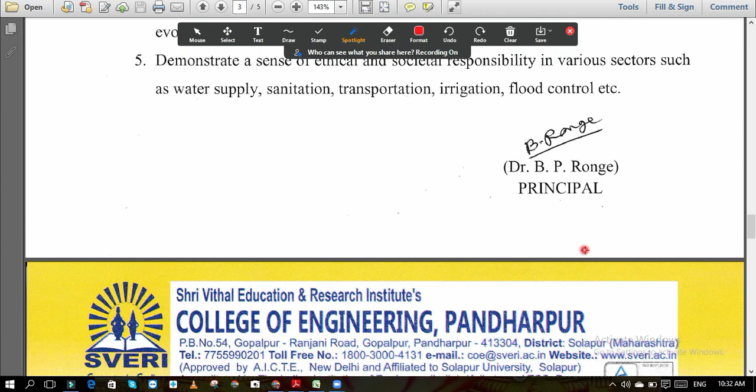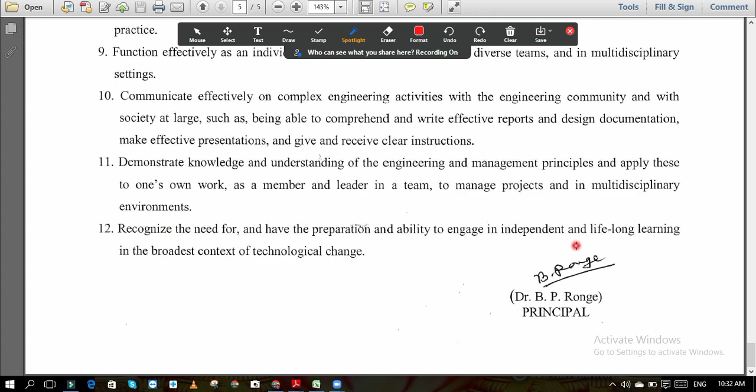Now, program educational objectives - these are 5 program educational objectives, which you have already known. Then we are having program specific outcomes, 3 program specific outcomes are there. Then we are having program outcomes, 12 POs are there. So these are the things.

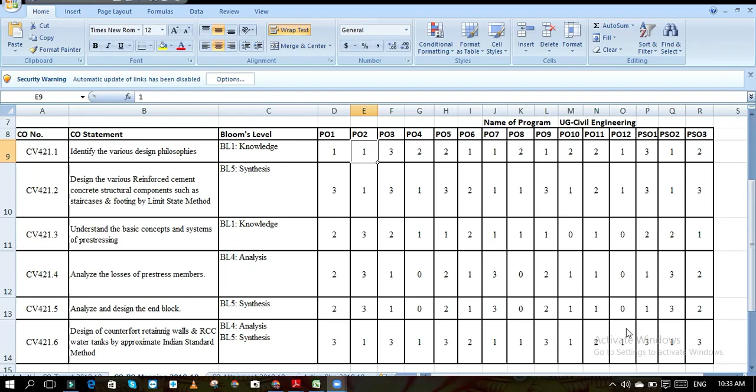I will send this PDF to you, you can go through these things. So now, after this vision mission, we will go for COs, course objectives - what you are going to learn in this course. So now here, these are the course objectives of Design of Concrete Structures 2.

After the completion of this subject, what you will be able to know and what you will be able to do is written in short in this course objective. These skills should be developed in you after learning this subject. Okay, so this is the mapping - forget this mapping, just concentrate on this part: first column CO number, CO statement, and Bloom's level. On these 3 columns you concentrate.

So first, after completion of the course successfully, the students will be able to identify the various design philosophies - what are the various design philosophies that you will be able to identify. Then second CO is design the various reinforced cement concrete structural components such as staircase and footing by limit state method. So you will learn how to design the staircase and how to design the footing by limit state method.

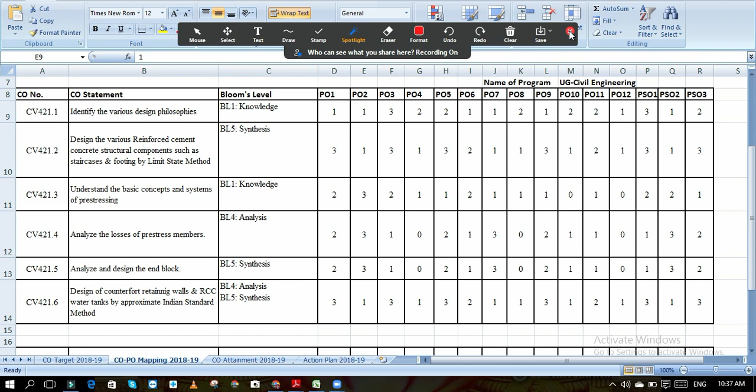You can take the screenshot of this. Now, moving further, we will move to the syllabus.

So these are the course objectives designed by your subject teacher, things we are expecting you to learn. Now we will move further, to section 1. In section 1 there are 4 units. In section 2 again 5 units are there. So in all, total 9 units are there.

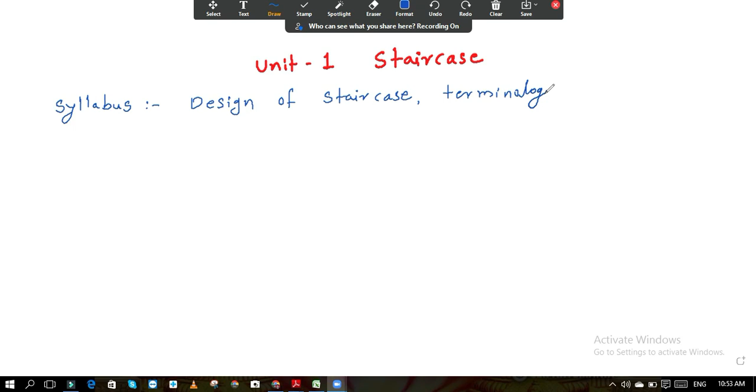So, syllabus. What is the syllabus of this unit? Here you are going to learn design of staircase, then terminologies - different terminologies are there - then design of dog-legged staircase.

Then design of dogleg staircase, open well staircase, and open well staircase with solid waist slab.

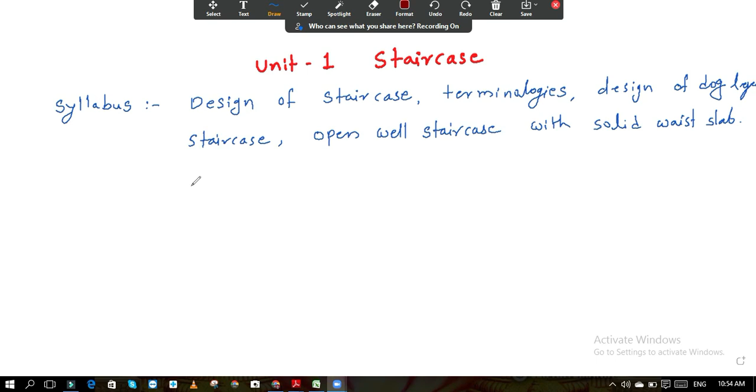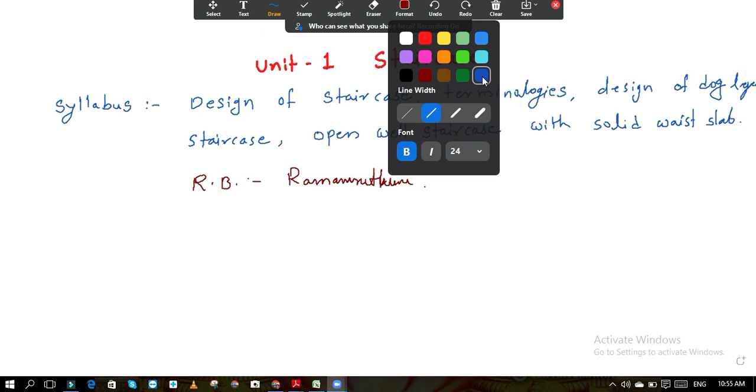For this unit, I will recommend a book for you, and that book is by Ramamrutham - author of the book. If you ask me for a recommended book, it is Ramamrutham. This is a good book for this unit, so refer this, it is very nice. So this is the syllabus.

Then next is about the title of the chapter. What is the staircase? It is the means by which one floor is connected to the second floor - the means by which two floors are connected is nothing but the staircase. The staircase is a structure used in day-to-day routine life. You know what a staircase is and why we use it.

A staircase connects two different floors to each other, so that we can use the top floor also, which is not on the ground, with the help of the staircase only. So about this, I can write over here about the title of the chapter.

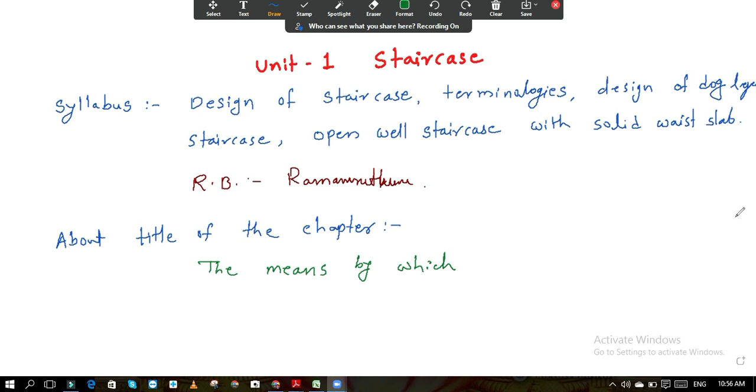The means by which two different floors are connected for motion or movement of people.

Is nothing but staircase. So this gives you the idea of what the title suggests. So is it over? So we will go to the next board.

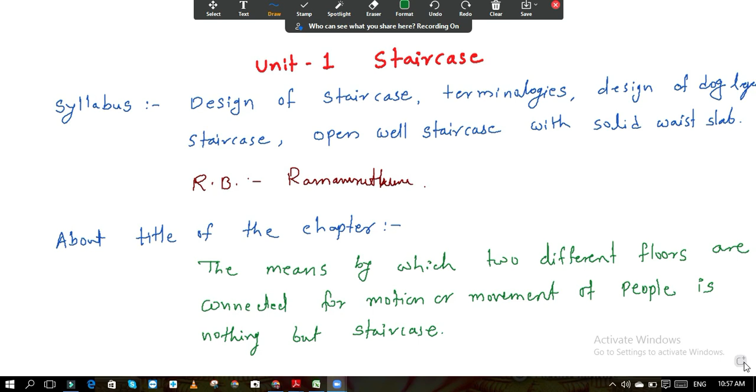So the next thing is the central idea of the chapter. What is the central idea of the chapter? This chapter is basically focused on the Indian standard design of staircase.

According to our IS code, Indian standard IS code, we design the staircase, and some basic terminologies are there - what is riser, what is tread, what is landing, mid landing, and all those things come under terminology. The design procedure of dogleg staircase and open well staircase are discussed in this chapter. So in this chapter, as I've already told you, we are going to design dogleg staircase and open well staircase.

So about this I can write over here: chapter or unit focus on Indian standard design of Indian standard design of staircases.

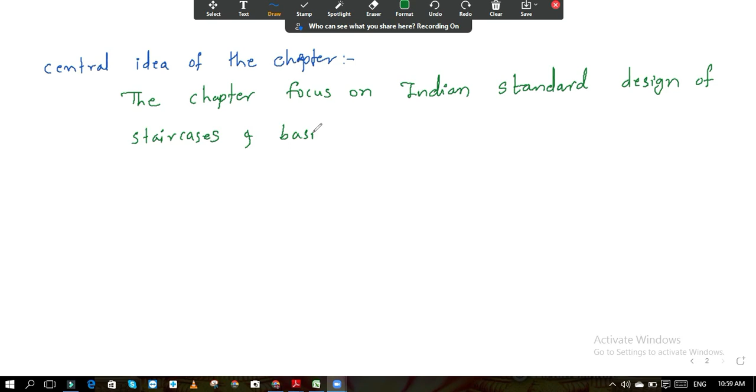Indian standard design of staircases and basic terminologies, the design procedure for

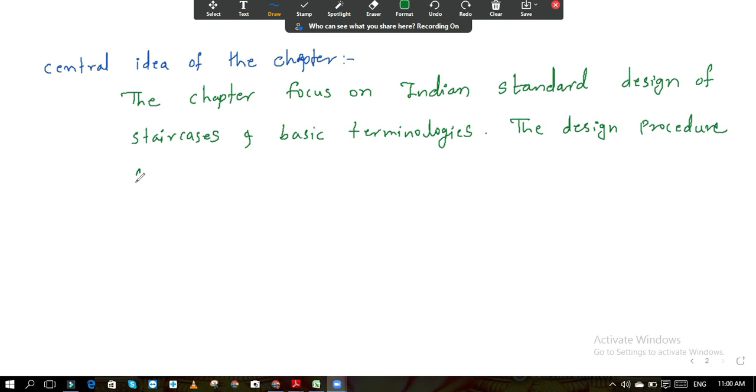dog-legged staircase and open well staircase are discussed in this unit.

This is about the central idea of the chapter. Now next is the basic importance of the unit in the subject, or importance of the chapter in the subject. So what is the importance of this chapter?

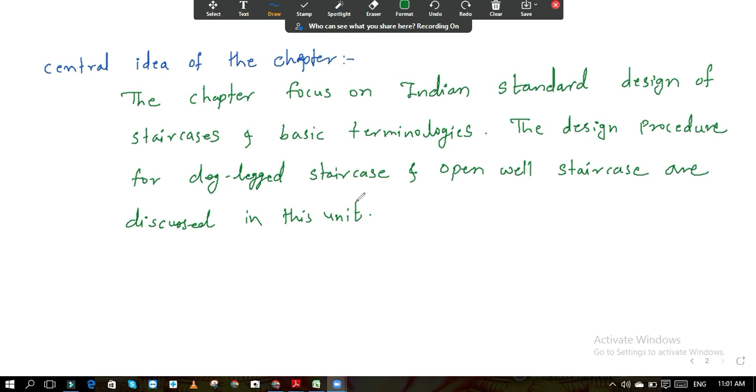This unit gives the basic idea about the evaluation of dead load, live load forces coming on the staircases. You will be able to know how to calculate the dead load and live load acting on the staircases, and design by placing steel reinforcement. Due to this unit you can thoroughly understand the concepts of staircase. So this is the importance of this chapter.

So next is the importance of the chapter. The chapter gives a basic idea about evaluation of dead load. What idea you will get is how to calculate the dead load and live load forces coming on staircases, and along with this, also the design by placing of steel reinforcement. So this is the importance of this chapter.

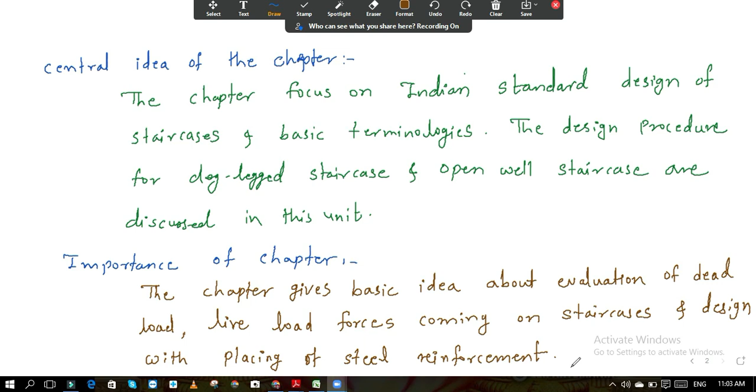Now the last thing is there, chapter outcomes. So in the beginning we studied the course outcomes, that is course objectives. Now these are the chapter objectives, chapter outcomes. What you will learn from this chapter.

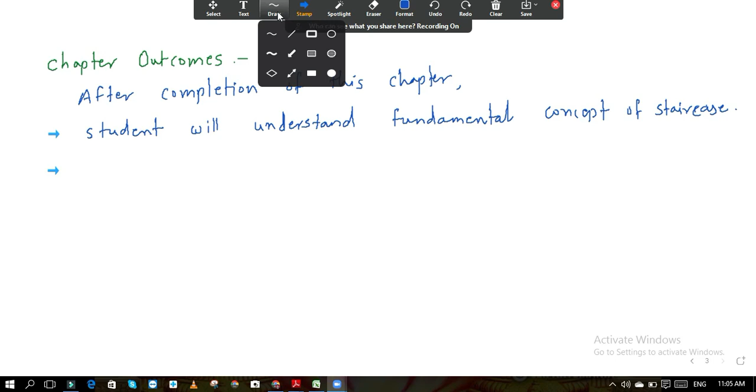After completion of this chapter, first thing, student will understand the fundamental concepts of staircase.

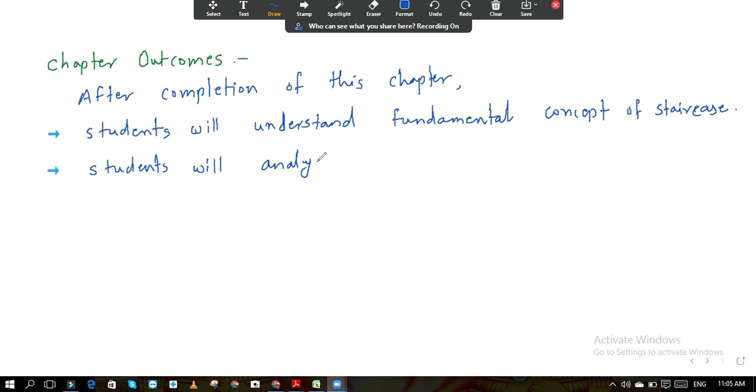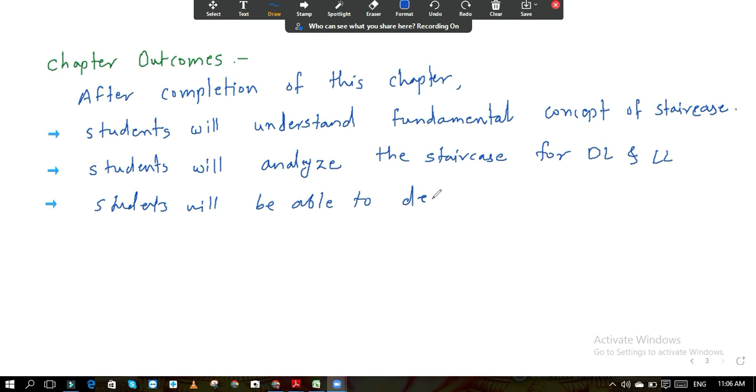Second, student will analyze the staircase for dead load and live load, and last one is students will be able to design the staircase. So these are the chapter outcomes.

So after successful completion of this chapter, students will be able to understand the fundamental concepts of staircase. What is the staircase? What are its components? What is riser? What is tread? Then students will be able to analyze the staircase for dead load and live load.

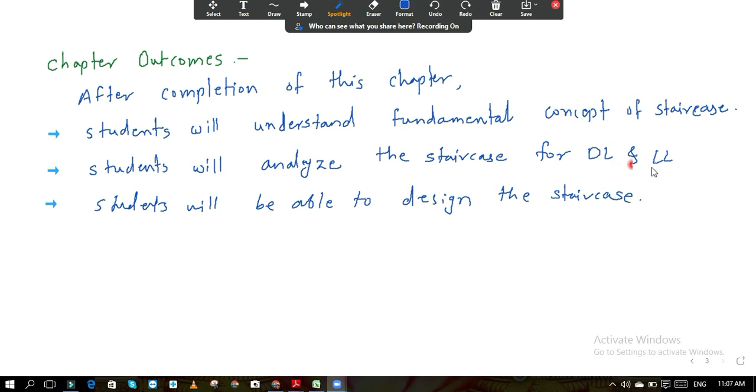So now we will start our first unit, staircase. It is better if you copy down the notes instead of taking screenshots, as I already told you. So now the name of the unit, staircase. You know that introduction - introductory part I will write first, then we will discuss it. Introduction.

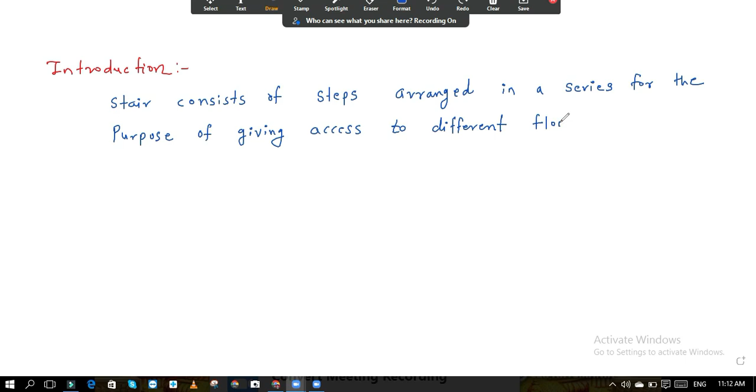It is very simple. While writing, you will understand itself. Stair consists of steps arranged in a series for the purpose of giving access to different floors of a building.

The location of stair requires good and careful consideration.

So very easy, simple introductory points are there. The first sentence is: stair consists of steps arranged in a series for the purpose of giving access to different floors of a building. Stair means a series of steps are there. What is the purpose behind providing those steps? It is giving access to the different floors in a building.

So the location of the stairs requires good and careful consideration. Means the location of the stairs should be proper. Sometimes if you visit anybody's house or any residential or commercial complex, internally you feel why the stairs are provided here like this, or it should be provided there, then it may look good or may be convenient. But the location of the staircase must be proper, so it requires careful consideration.

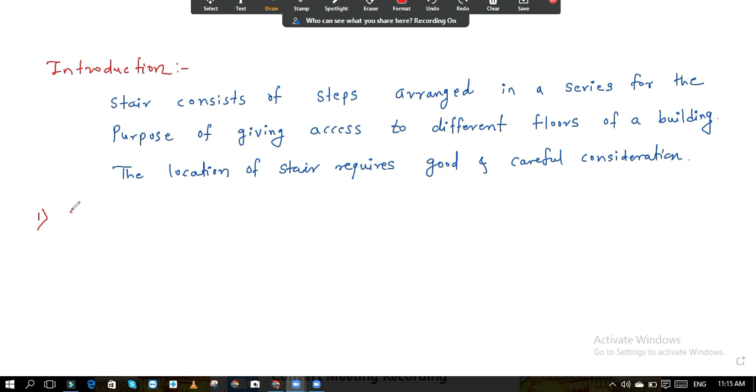Now different terms are there that we will understand, which are frequently used in staircase. The first term is tread, notation capital T. It is the horizontal upper portion of the steps on which we keep our feet. So this is the tread.

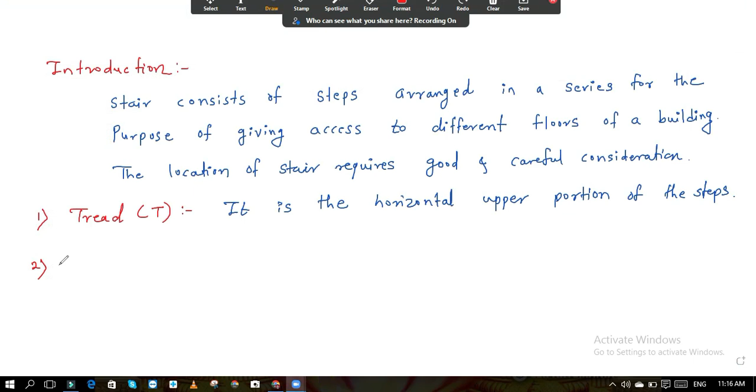Second, riser, notation R. Riser is the vertical portion of the step. If we draw this riser and tread, suppose now this is the slab of the staircase - I will draw a simple line diagram.

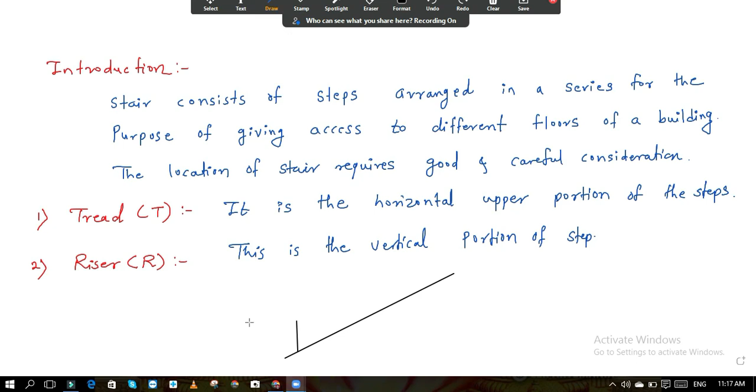This is the step. These are two steps I have drawn here. This portion is called the tread, and this portion is called the riser. The angle here, if I draw the horizontal line, is the angle of the waist slab of the staircase. This portion is the waist slab.

This slab is the inclined slab. Remember this, it is not the horizontal slab. So this is about the riser and tread.

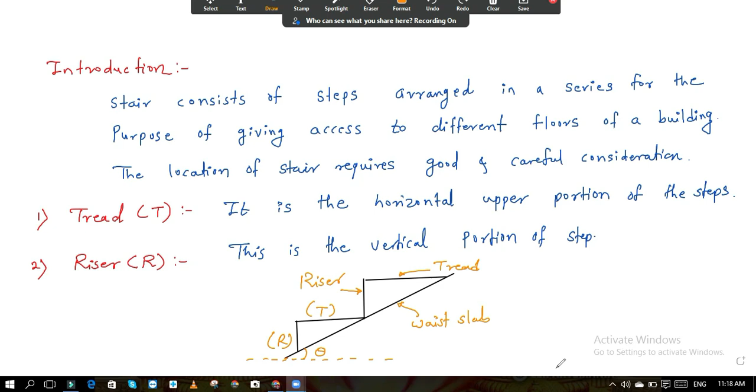Now next is the winders. Third definition is winders. This is also something you have seen at many places. Winders, so these are the steps.

These are the steps used for changing the direction of the stairs. Normally, in the case of a dog-legged staircase, winders are not provided.

But sometimes in the case of an open well staircase, there may be a need for providing winders. Whenever we need to change the direction of the staircase, we lay down these winders. Every time we cannot do that. There should be a mid landing, and from the mid landing we can change the direction of the stair. It is not possible every time. Sometimes due to space requirements or some other reason, we need to change the direction of the steps, and at that time these winders become very handy.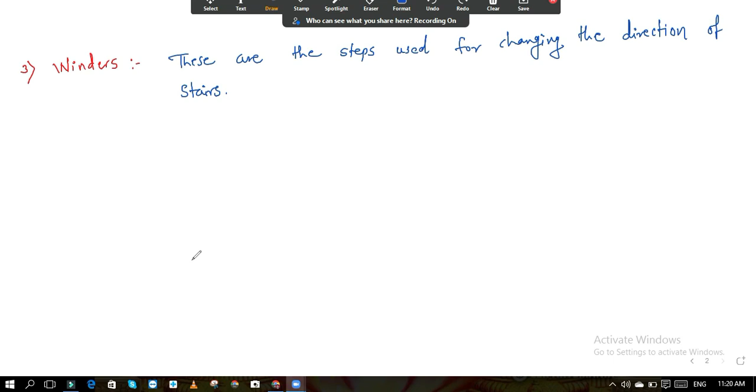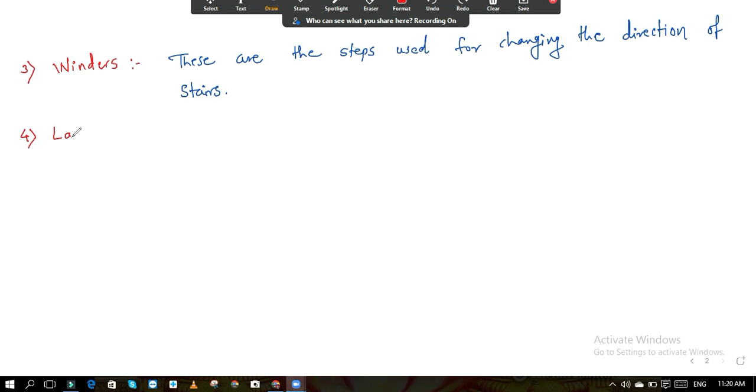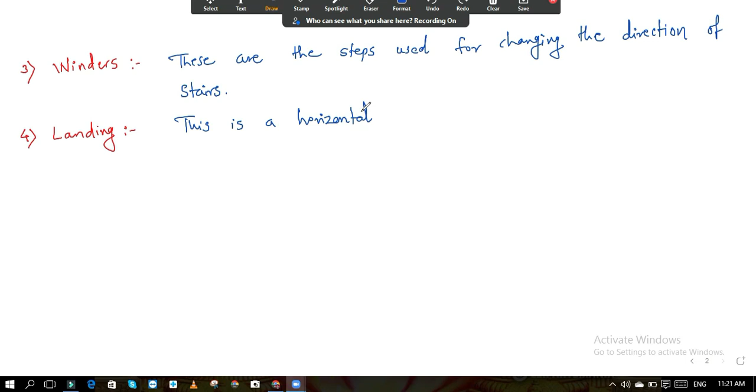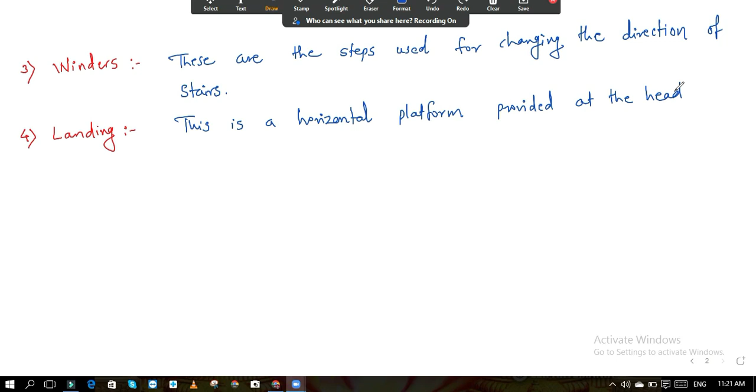Then next is the landing, the fourth one. Landing, this is a horizontal platform provided at the head of a series of steps.

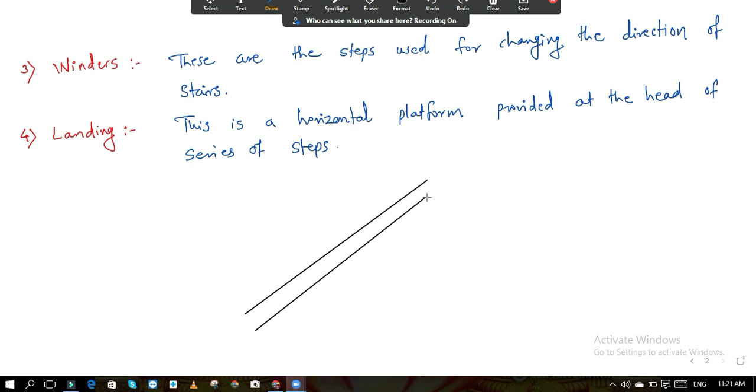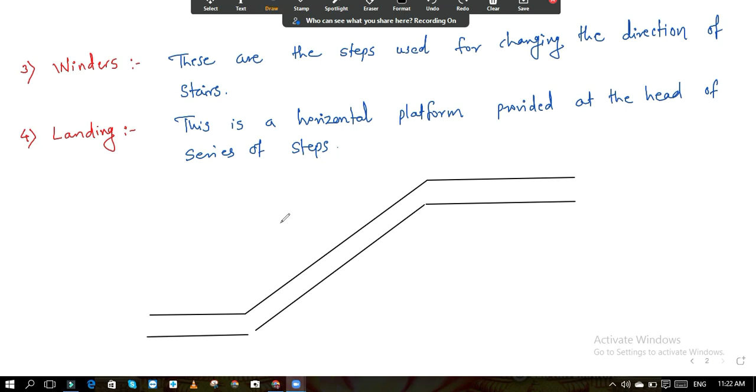So we will draw it. What is landing? This is the waist slab of the staircase. Now if I show here in section, it may be supported somewhere. So landing means what? Here the steps will be there. This is the portion which consists of steps. So these are the steps. If I number it, this is step number 1, second, third, fourth. Total 4 steps are there.

But how many risers and how many treads are there? Suppose T is the number of treads. How many treads are there? 1, 2, 3 and 4 - so 4 treads are there. How many risers are there? 1, 2, 3, 4 - so 4 risers and 4 treads are there. But don't count this portion as a tread, this portion will come in the stair itself, so I have shown it like this. It should come over here.

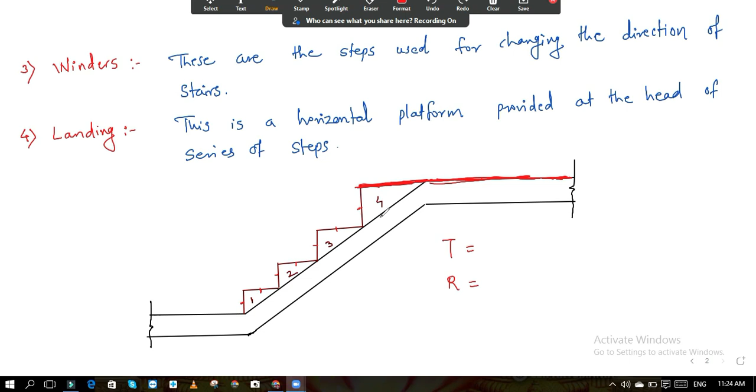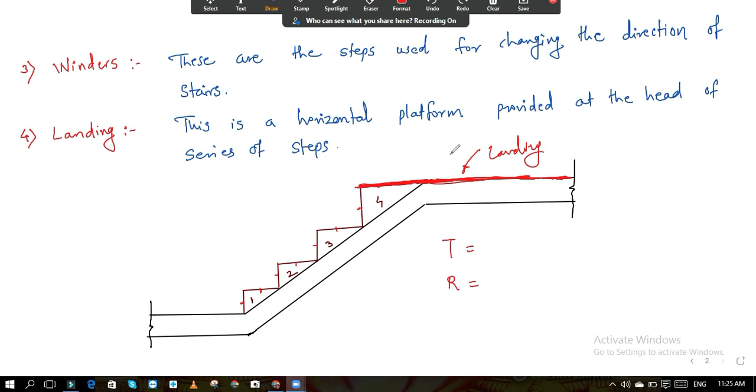So here you will get 3 treads and 4 risers. Treads are always equal to risers minus 1 (T = R - 1). Remember this, you have already seen this in BCD, BPD, you have drawn the staircase on a sheet.

Then after landing, next is the nosing.

What is nosing now? Nosing is the outer projecting edge of tread. It is nothing but the nosing. So tread is there, and the outer edge of the tread is called as nosing.

You might have seen that if a residential building has 3-4 steps at the start to enter the house, those stairs are generally made of granite. Nobody uses flooring like Tandur there. Normally kota or granite is used for the staircase, for the appearance. But if you use granite, you have to mold it for the staircase.

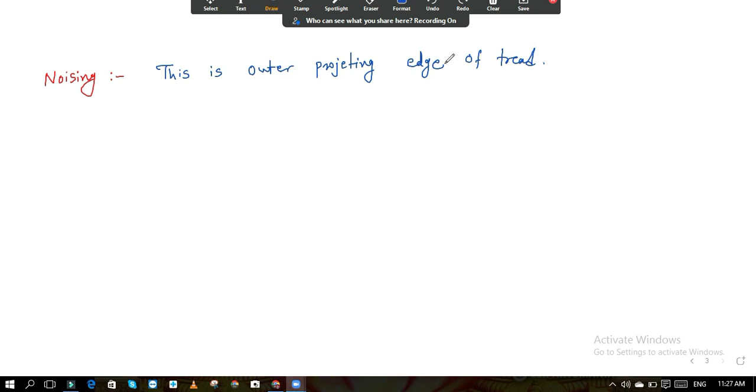Nosing means the edge of the tread which is visible to our eyes, not the other end. The other end of the tread is fixed there with the riser. So the one end of the tread is the edge, and that is nothing but the nosing. Then the next one is the flight.

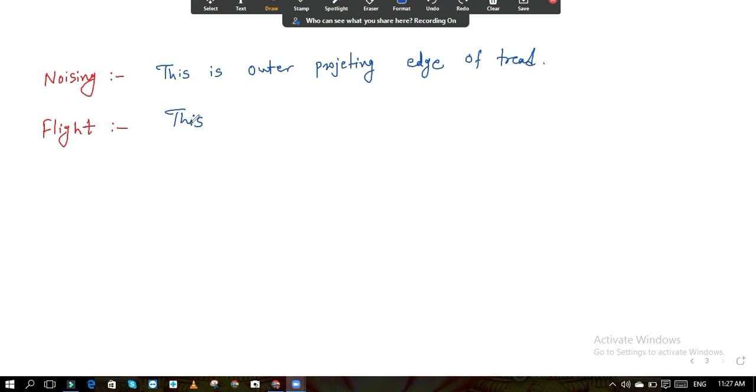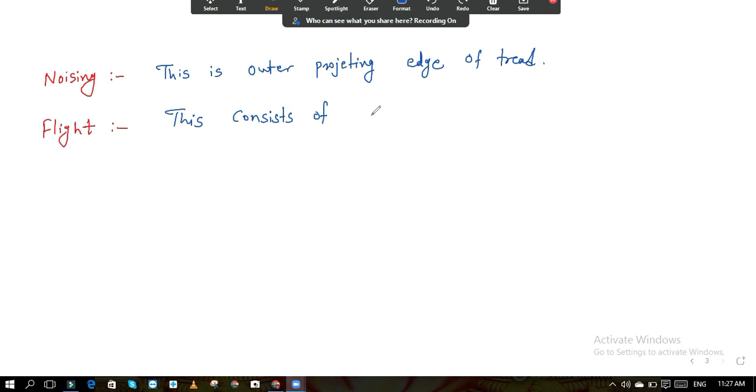What is the flight? Flight doesn't mean aeroplane. Flight means this consists of a series of steps provided between landings. In between two landings, whatever number of steps are there, that series of steps is known as flight. Now let me draw the plan of a dogleg staircase, just a line diagram.

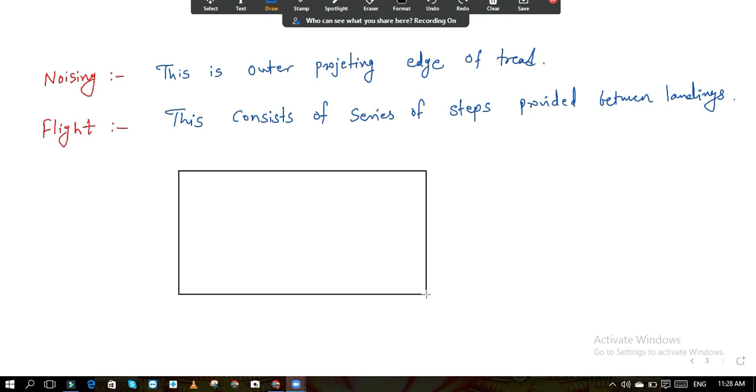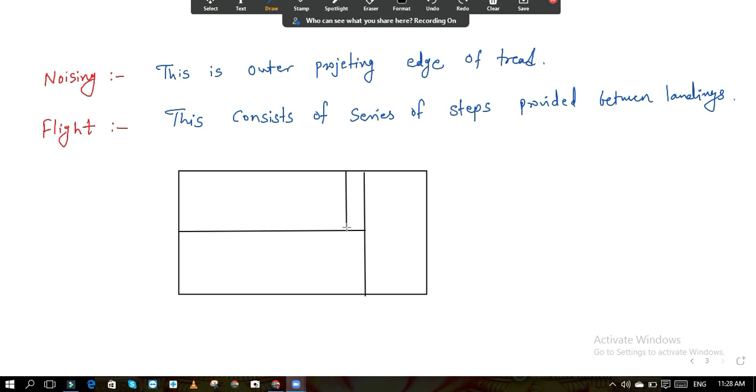Suppose here is this portion, the landing portion. Now to draw the steps, these are the steps. So from this side, you will move up.

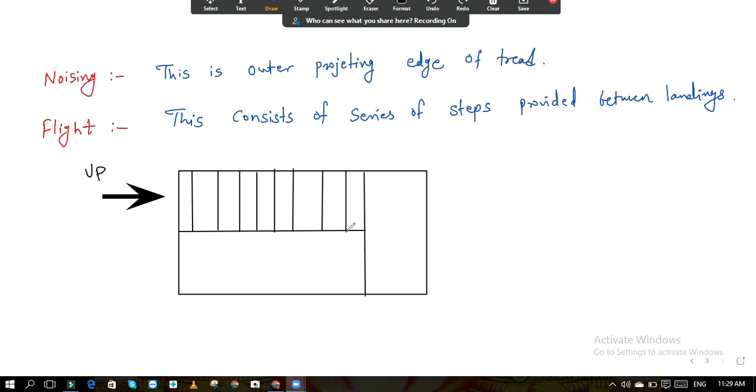Now whatever this is, this is the single flight. Now see this distance from this point, or if the approach slab is there, the slab in front of the staircase, whatever portion is here. Suppose some portion is here like this. I am showing it dotted, it should not be dotted.

This is called approach slab. Approach means the first slab. This landing is called approach. This is called landing. This is also called landing. And if I draw this like this, then this is called approach.

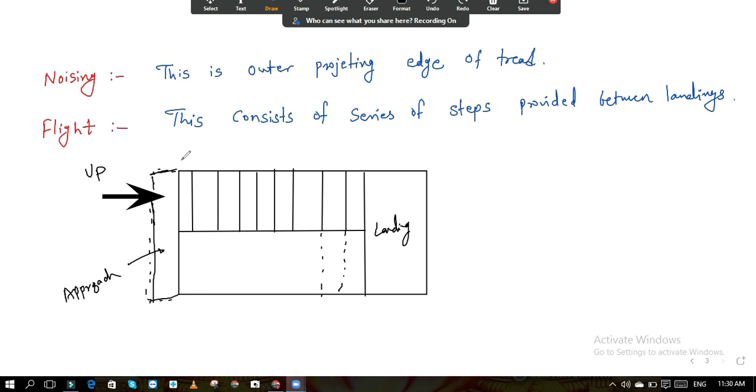So flight means what? This is the flight, whatever series of steps is there. This is called flight.

This length is not called flight. Between these two landings, whatever series of steps there is, in between the approach slab or mid landing and top landing, that series of steps is called flight. And now the distance I'm showing from this to this is called the going length, the horizontal distance.

Excuse me sir. So that approach slab will become at one side only, no? For one flight only, not for two flights, no? Yes, because it is only for the one landing flight.

It is only for one flight. At the ground floor, whenever you start from the ground floor, at that time only the approach slab will be there. Once you pass the approach slab, then there will be the series of steps. First, here it will be the approach slab in this portion.

Let me draw it neatly. Don't think that at the top also approach slab is there. Here the approach will be there only up to this point, at the ground only, and this portion will be connected to whatever landing is at the top floor, there it is connected.

So now you can see, first you start from the approach. Some portion is left in front of the stair sometimes, that is approach. Then the series of steps is there, this is your flight, and this length is also called the going length. Then you reach the mid landing, called landing or mid landing. After mid landing, again you start climbing the steps and reach the first floor, and this is the portion which is the landing of the first floor, where the slab of the first floor may or may not start, but here the landing of the first floor is there. Is it clear? Yes?

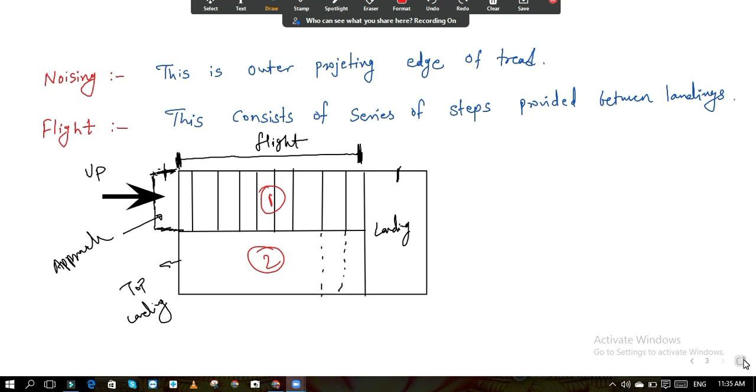So now I will tell you some standard dimensions related to the staircase, some standard dimensions of the tread. Standard means some rule is there: how should you take the riser, how should you take the tread, what should be the dimensions, what should be the range. That is given.

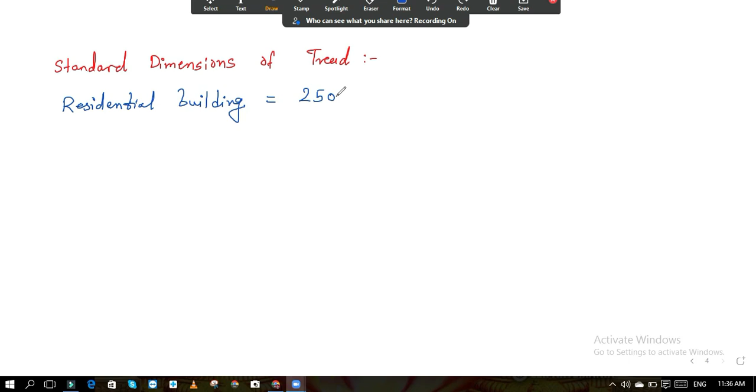Standard dimensions of tread. For residential building, it should be 250 mm to 270 mm.

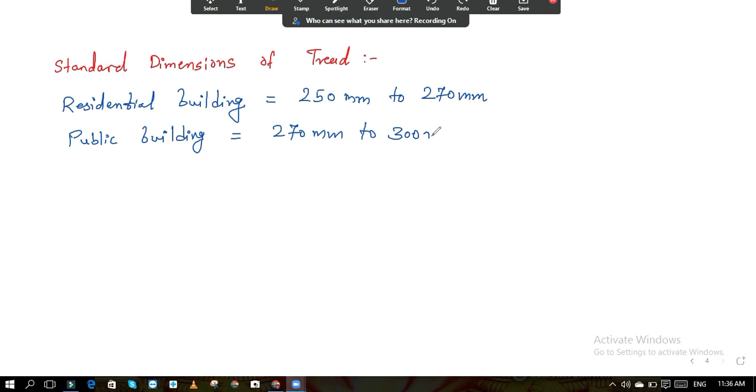For public buildings, it is 270 mm to 300 mm. But for public buildings, generally we prefer 300 mm, and for residential buildings we prefer 250 mm. In some cases we also go for 300 mm as per the requirement of the client. But for public buildings, 270 is minimum, but we always go for 300 mm. So this is the standard dimension for tread.

Remember this, this can be asked in the MCQs. Then second, if possible, take down the notes. I am insisting you take down the notes instead of taking screenshots. The standard dimensions of riser.

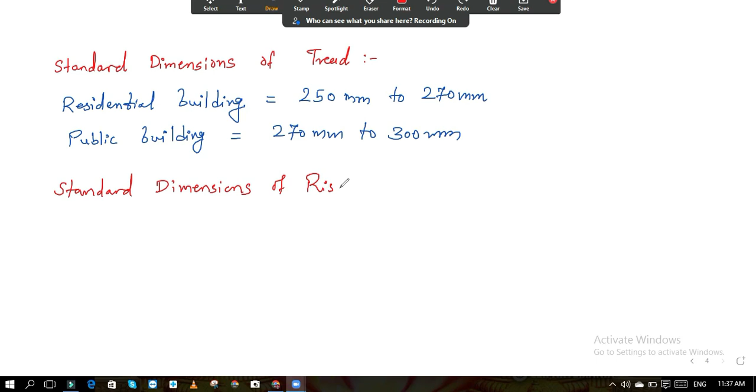Again for residential buildings and for public buildings. For residential building it is 150 mm, you can go up to 180 mm. After 180 mm it is also possible, but it is very difficult.

Human is a very habitual being, so we don't have that much habit of lifting our leg above 180 mm. If you have a habit of climbing a stair with a riser of 150 mm, and for years you are walking on that staircase at your house, and from last 20-25 years you are walking on it, you get habitual to that. If you go somewhere else, suppose a temple with big steps provided in ancient times, you will find it difficult to climb those steps, because you are habituated to the steps provided at your home.

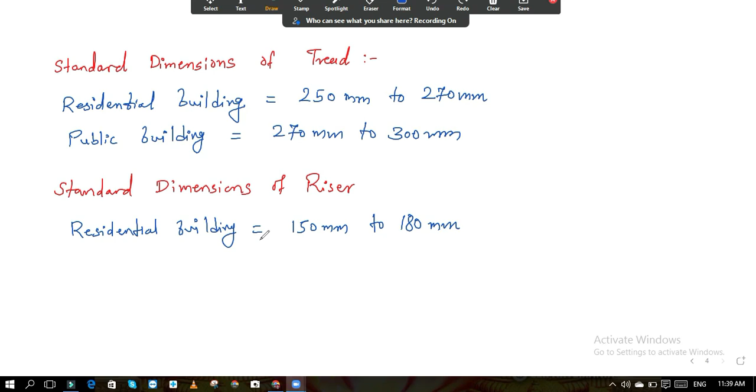So some important points are there, this is about the riser and tread. Also regarding some points about landing and all those things, I will show you here.

Okay, so the minimum width of stairs. What should be the minimum width of stairs for the residential building? It should be 1.05 meter, that is 1050 mm.

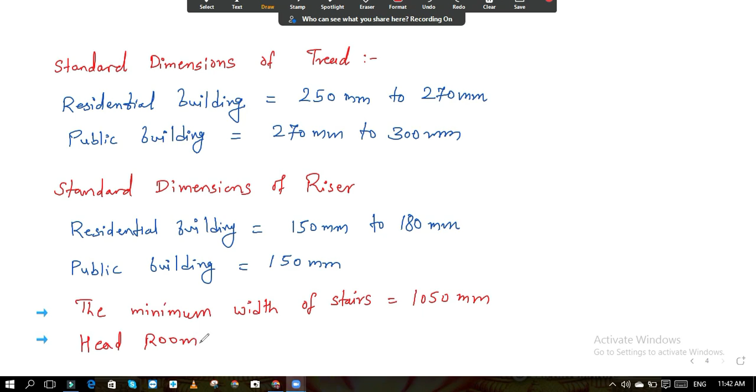Then the headroom over the stair. You know that headroom is provided in the stair. Headroom means at the top. What should be the headroom or height of that stair tower? It should be at least 2.1 meter, that is 2100 mm. This should be the height of the stair tower.

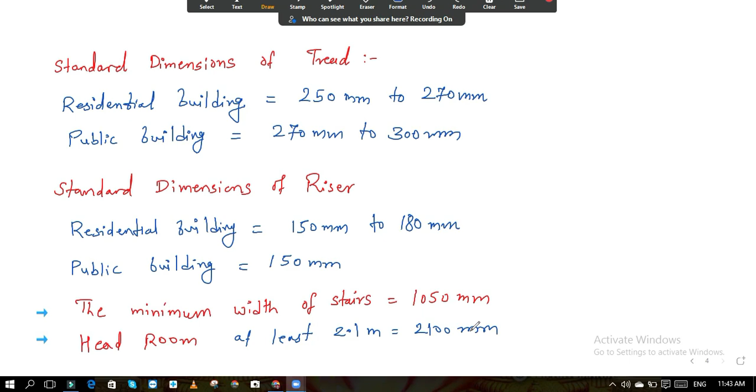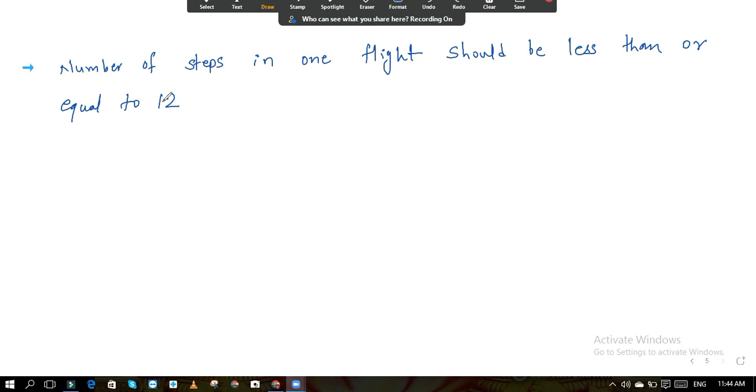Then the number of steps in one flight. How many steps can you provide in one flight? This is also important. The number of steps in one flight should be less than or equal to 12. It should not be more than 12.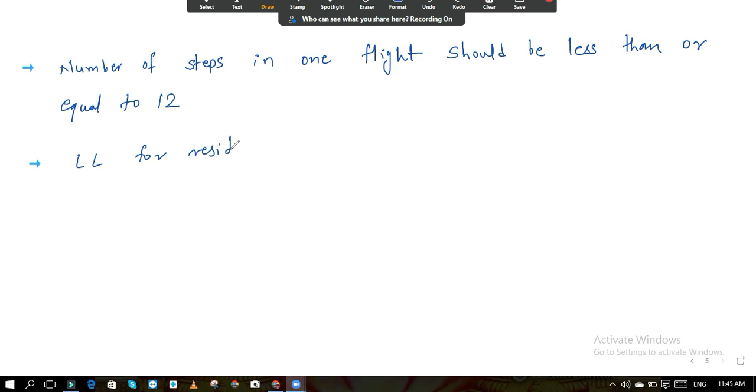Next important thing is live load for residential building. If the residential building is there, then the live load for residential building is considered between 2 kilonewton per meter square to 3 kilonewton per meter square. So 2 to 3 is the live load, live movement load.

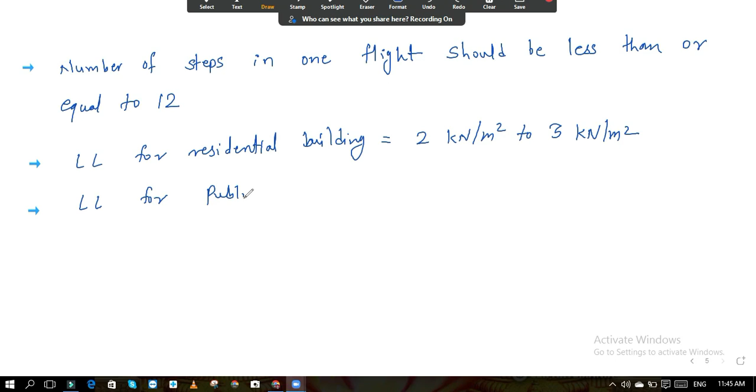And then live load for public building is taken as 5 kilonewton per meter square. So these are some important points. In the numerical, if the live load is given to you, then whatever live load is there, you should consider it while solving the numerical. But if the value of live load is not given, then from this you can take the value depending upon the type of building, whether it is residential or public building.

So this is the introductory part of the staircase. Many points we have covered. I am not going into detail of the part which you have already studied in BCD, BPD. You have drawn the staircases, the dog-legged staircase, open well staircase, and you know the different types of staircase - quarter turn staircase, half turn staircase, circular staircase. There are many types of staircase, and you will easily get that if you Google the things. These are very simple and easier, already taught to you in second year, third year itself.